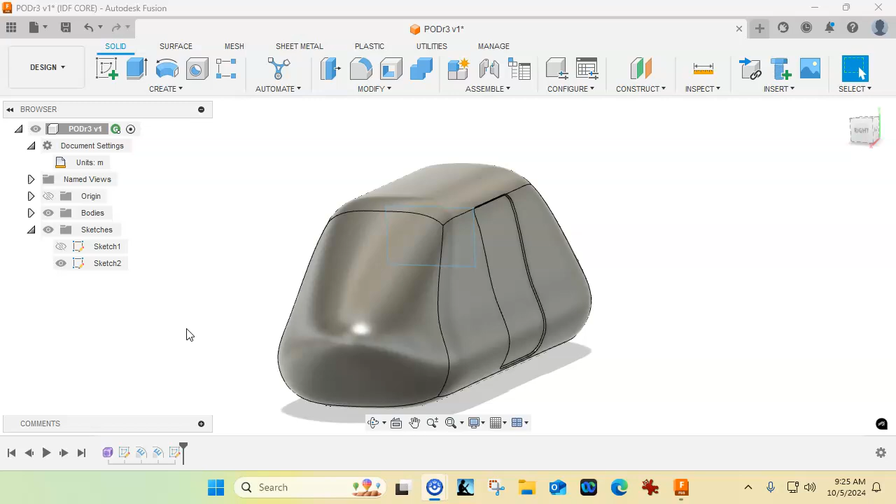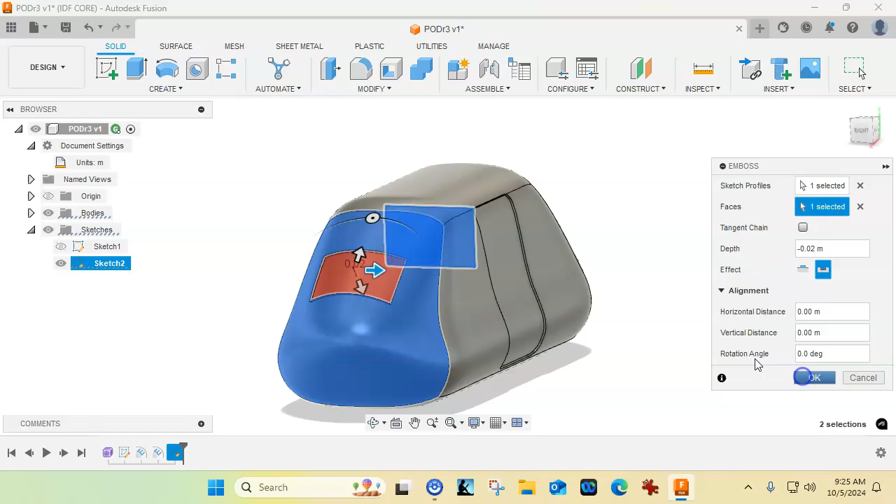So let's go with we generated the sketch in the right plane, and I want to do another emboss. We're going to pick the view and then the front face, and we can kind of see where that's at. We could probably stretch that out. That's one of the reasons why I didn't want to fully define it. But for a window, that looks okay. The rounded edges look a little bit better, so let's go one more time and we'll rotate that around.

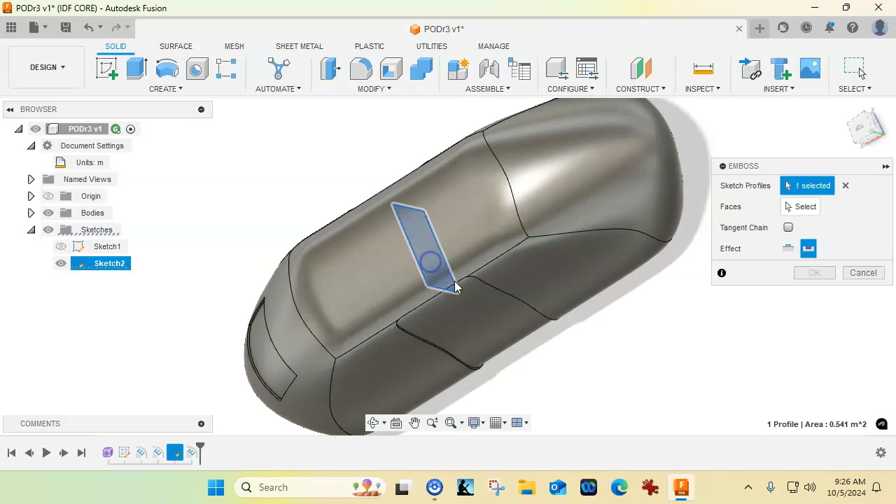Go to the emboss, pick my profile, pick the face, and hit OK. All right, so that gives us some pretty good geometry.

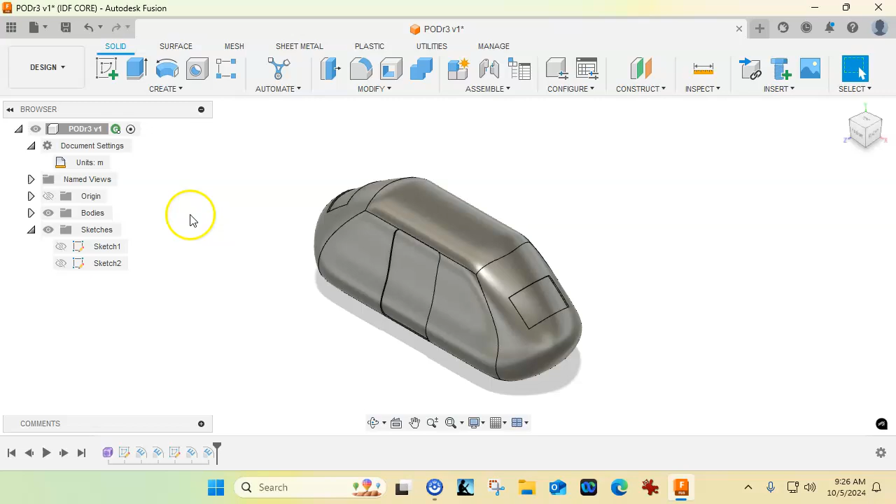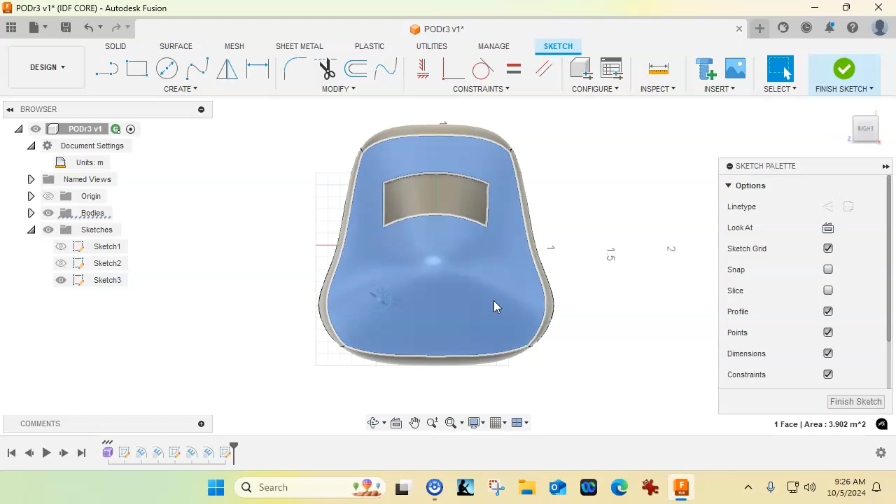If we want to add headlights, markers, something else, we would also be in the right plane. So let's open up a sketch, pick it up on the right, and we'll just put that looks okay. Keep in mind that we can Control C and Control V. I could also put in symmetry and mirror.

Let's see, I'm not getting, there we go. Make sure that that is selected. I'm losing something on that one, so I think I'll just redraw it. My video card is not cooperating.

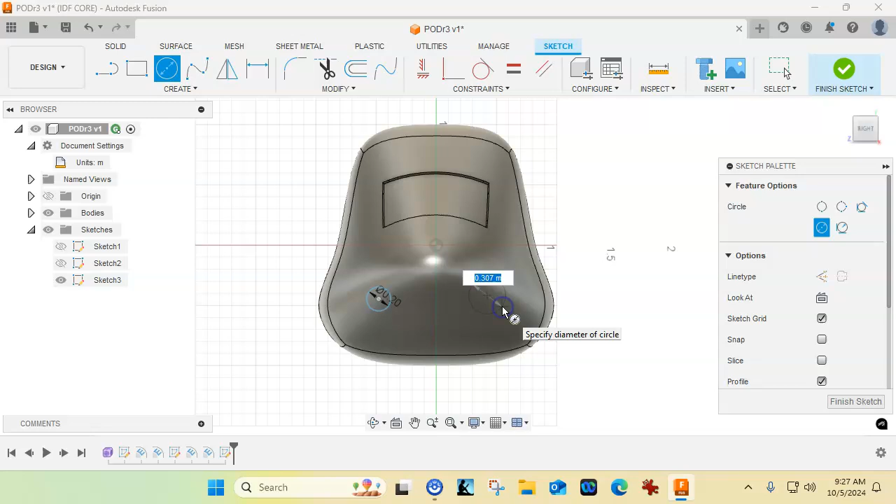So if I set those to equal, it will do the same thing. And if we were going to align this a little bit better, I would apply the symmetry.

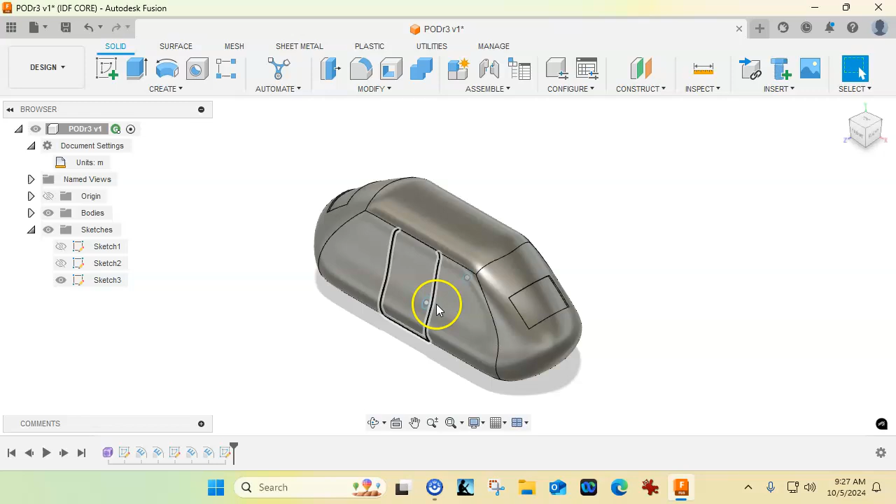All right, so let's go ahead and extrude this out. We'll go ahead and zoom in, and we'll pick the two profiles. And I want this to be symmetric. And we'll go the whole length.

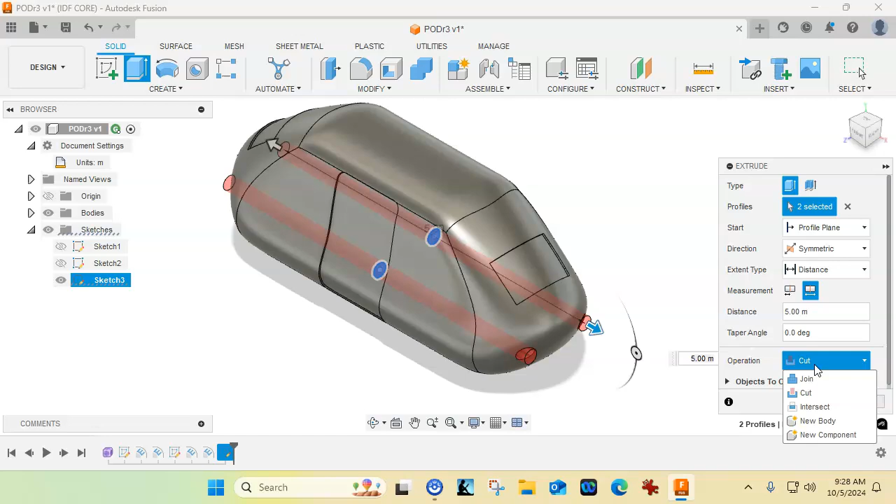And I'm out to 5 meters. So this got pretty big. Probably a little bit bigger, but now we're up to holding 2 or 3 people and 4 people and going through that process. This is now a cut. One of the reasons I always look at the operation first is that that's usually the one that I forget. We'll go ahead and hit OK.

All right, so at this point, I'm going to go ahead and hit save again. It's going to apply the revision. It's just a user save. And at this point in our timeline, we have our extrusions, we have our geometry, our doors.

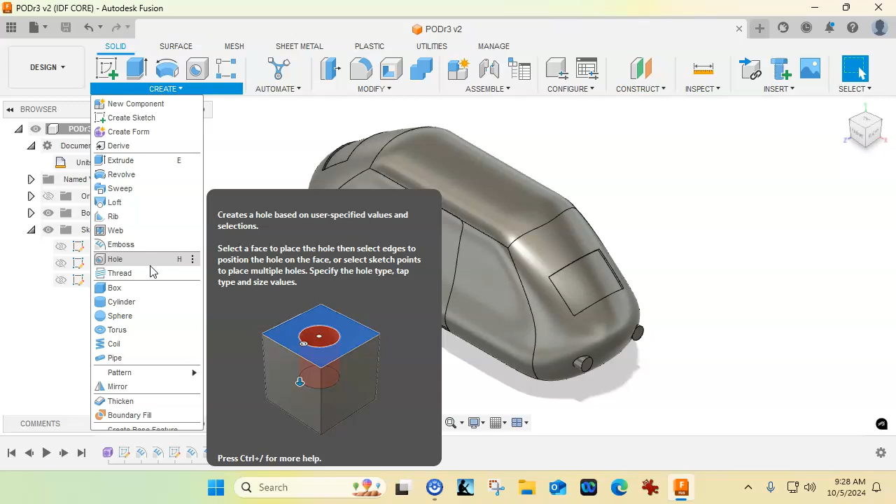Let's go ahead and we're going to output this to an STL. No, we need to scale it first, then we'll output it to the STL. All right, so the issue is that this thing is 5 meters long, and I need it on our website, said that it was 250 by 210 by 210 is our X, Y, and Z envelope.

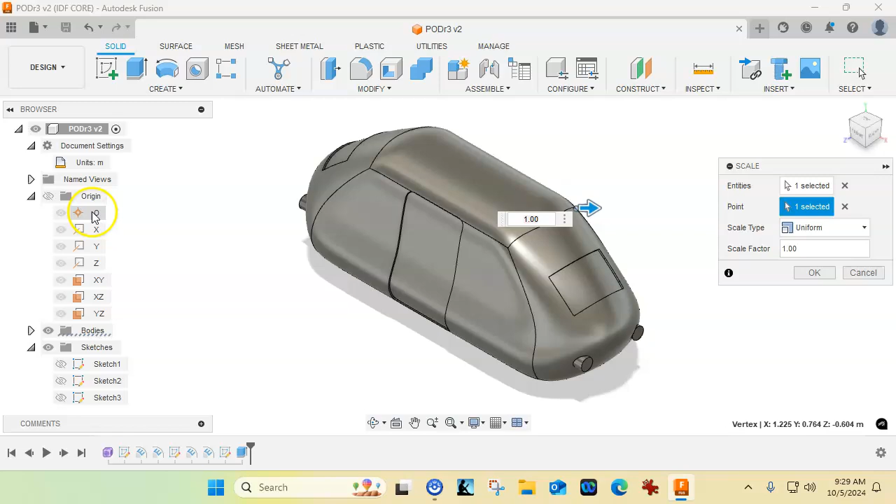So I am looking for the modify. I'm trying to create a scale, and it's a modify scale. So we're going to go that way. The point should be at the origin, but just to make sure, I'm going to pick the origin. Okay, so one selected. That looks pretty much like it.

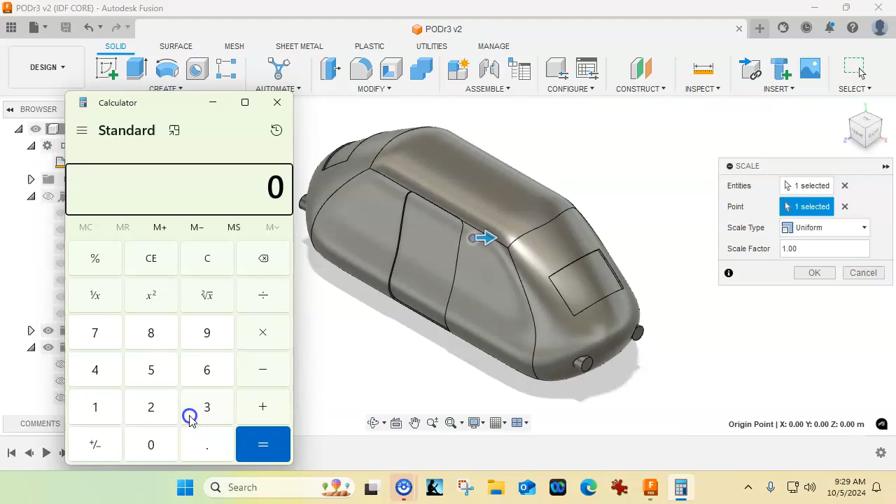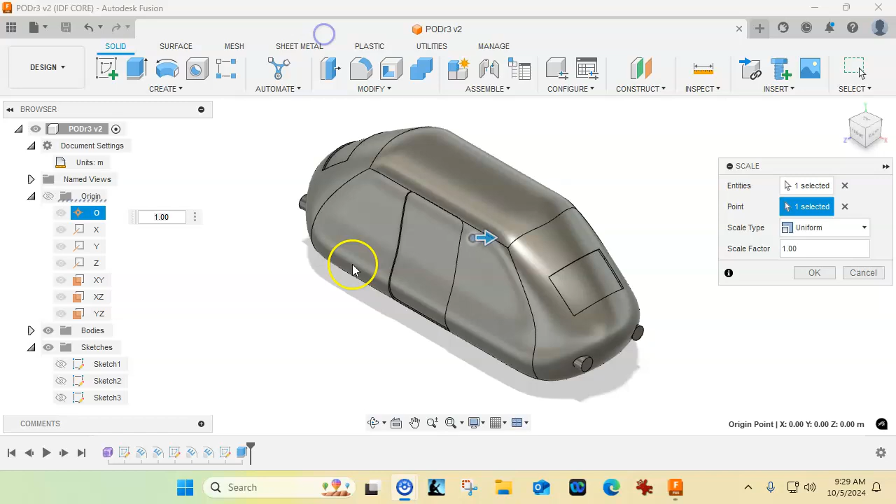So if we do the math, let's see, do I have my calculator handy? And we want to go to a smaller number. So if I do 250 millimeters divided by 5,000 millimeters, we're going to be at 0.05. And that puts us right at the extents of the print. So if I were to put this at 0.04, that looks pretty good.

And now we have a really small geometry. And I'm not too worried about the orientation. Oh, and it did rotate, so if we go that way, all right, so the little arrows up here will rotate 90 degrees.

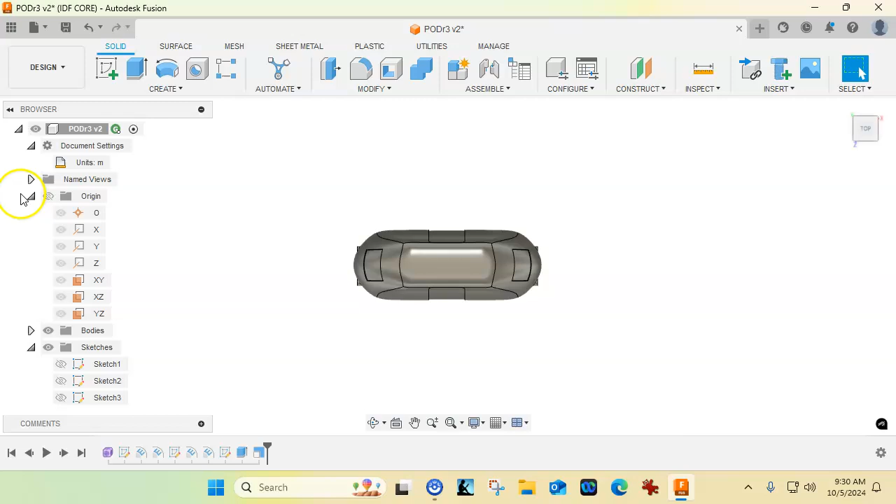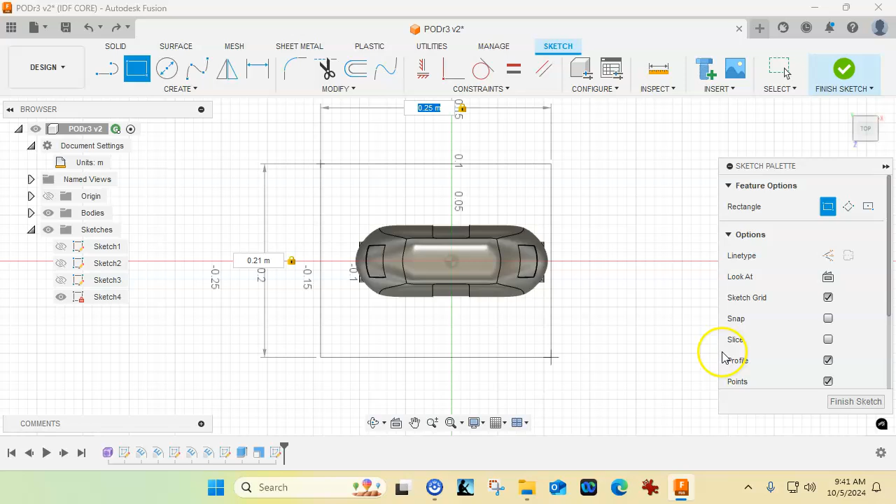So let's open up a sketch, and we're just going to verify by putting in a rectangle. I'm going to create a rectangle and we'll apply the position. 0.25 by 0.21, and then once I apply it, and we can escape to make sure that I'm in the selection, I can place that, and that will ensure that it fits inside of the print envelope.

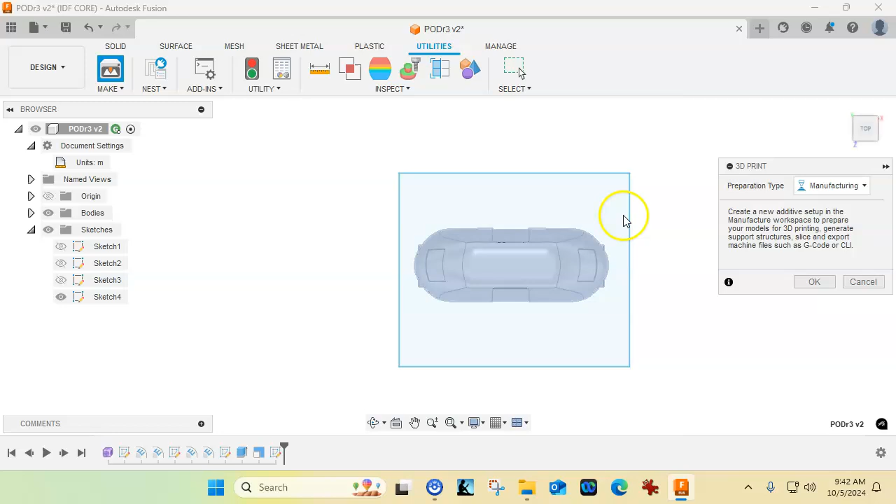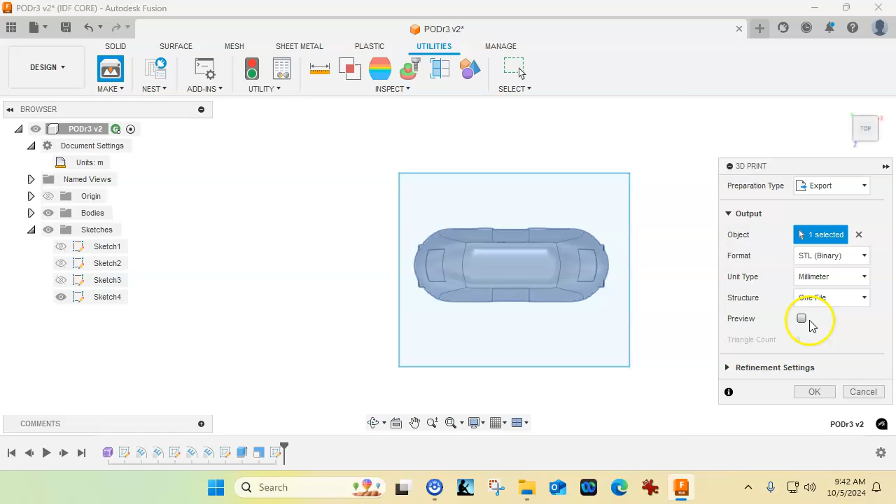Now we can go to the utilities and the make and 3D print, and we're going to export this as an STL, and I don't think it matters if it's binary or ASCII. The unit type, let's put it back to millimeters. And we're structure, we only have one body, so there's one file. And then we can hit OK. And we want to make sure that I'm putting it to someplace that I can find it, so the downloads, and then we'll save it.

All right, so that puts us to where we can present this. The other alternatives on the export directly, if we look down through the list, we can output this to the different file types, but I'm not seeing anything for the 3D print.

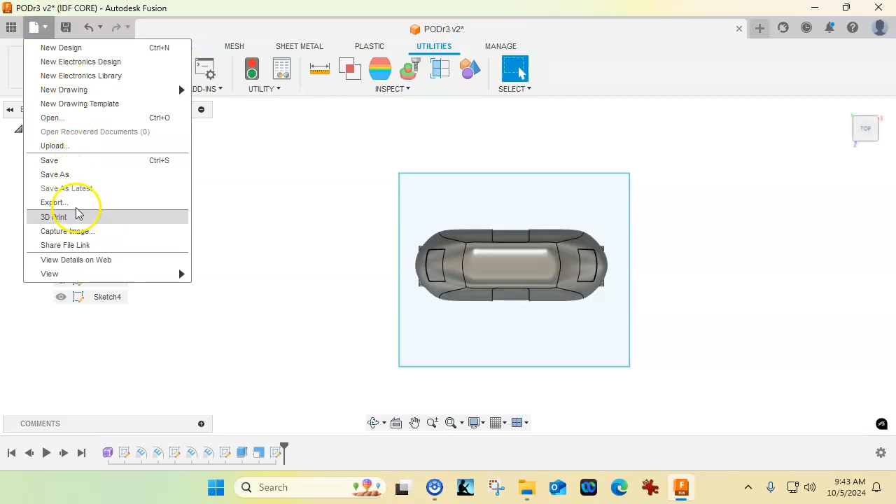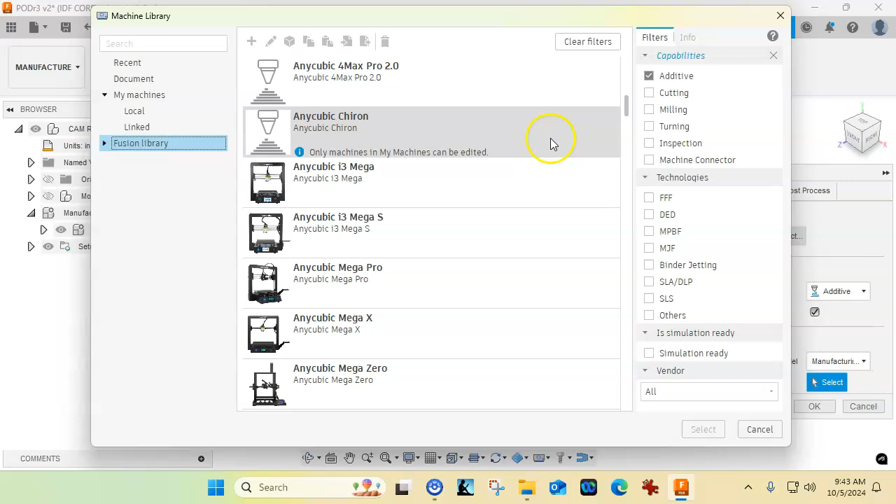And if we go back into the 3D print, that will take us there directly. The manufacture side is if you are 3D printing directly to a 3D printer, you can set this up under additive and pick from the machines. I think mine fall into the category of not new enough, but we would pick the correct machine.

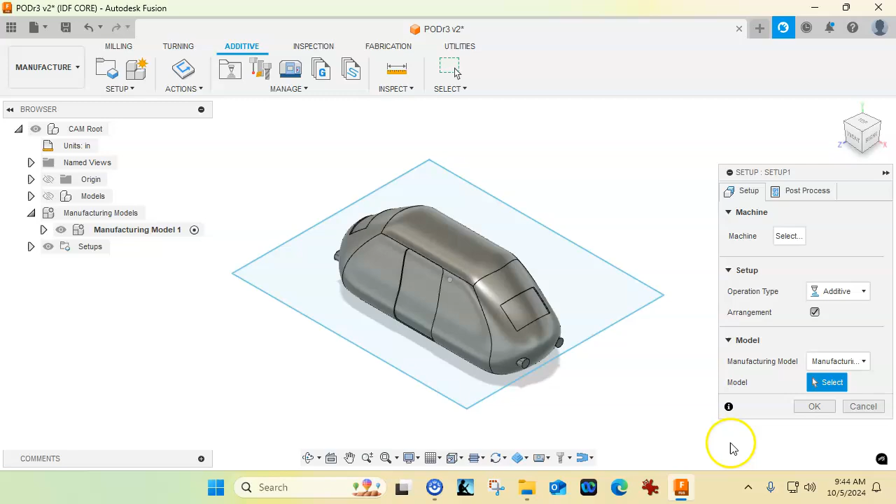And then this would output to a flash drive, and you would be able to create the settings within the setup and output the G code to apply it directly into the 3D printer. Okay, so you have your exported STL file.

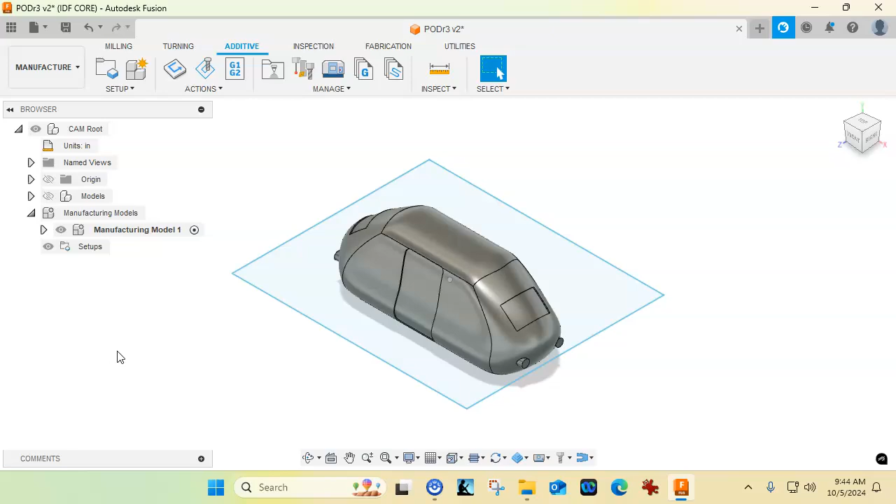You can submit that to the link in Canvas, and the print lab will follow the process for your course and get you in the queue to get this printed.